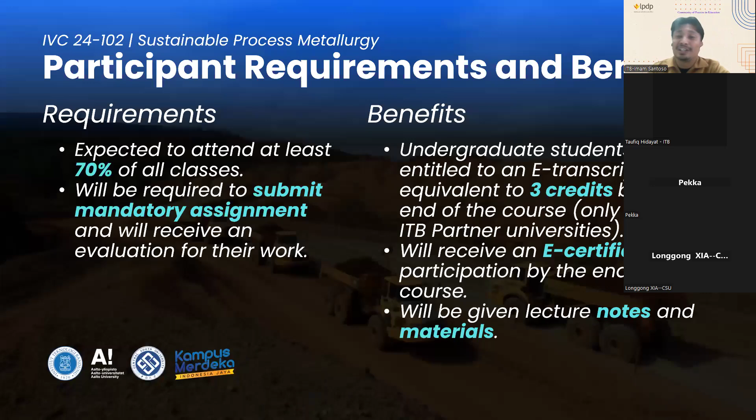So you will have credit for ITB students. You have to attend 70% of the class, and for international students, you will have credit also. The credit can be transferred to your original university. And in order to get credit, you have to attend at least 70%, and you have to write a literature review, minimum 3,000 words. The topic of the essay is recent development of technological review for metal production. So for ITB students, for example, it can be chapter 1 of your final bachelor thesis, because in chapter 1 you have to write like a review.

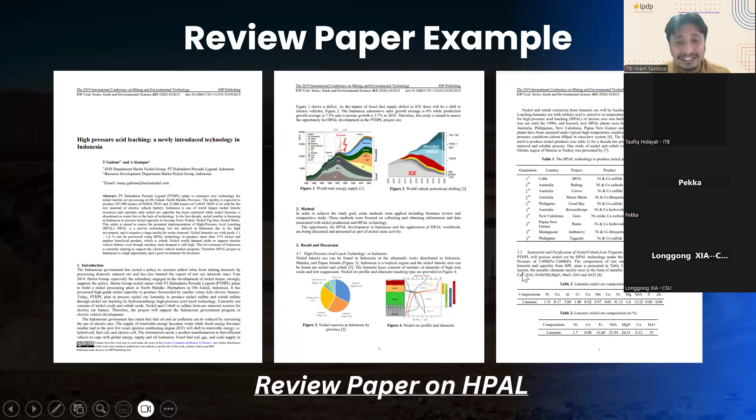All the material, all the links will be submitted in the Edunex system, including your final assignment. You have to submit in Edunex. We will explain later on via WhatsApp how to access the Edunex system of ITB. Because you already enrolled, you automatically have the right to access the Edunex system. So this is the example of the writing, the essay. You will get these materials. And yes, that's from me as the coordinator of the course.

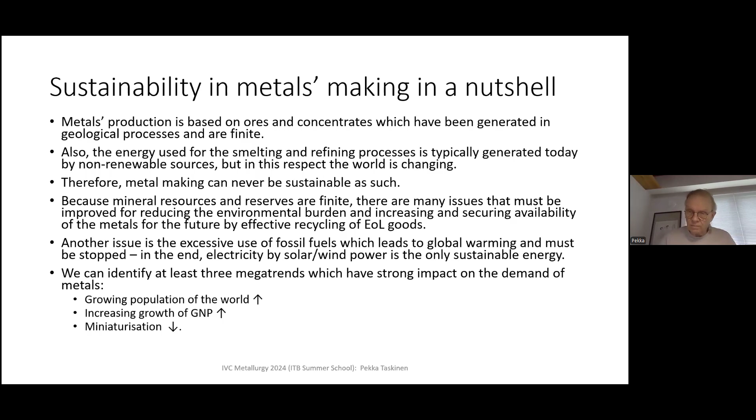The same has happened with cell phones. Nokia, which is not a cell phone producer today, launched their first portable cell phone in the late 80s, and it was like a shoebox. Its weight was probably 5 kilos or something, and it was really portable, but you couldn't squeeze it in your pocket. Nowadays, cell phones are perhaps 100 grams in weight, and their capabilities are completely different from Nokia's first cell phone. So that is miniaturization. Everything is packed into smaller space. All components are smaller, so less metal, less resources in general, which also has some negative features, but that's not the topic of my lecture today.

So how, in a very general sketch, so to say, metals are produced. We have today primary metals production, which is ore extraction and concentration. These are taking place at the mine site, and then smelting. And the same is practically used in secondary metals production, where these end-of-life goods are coming to the market. So municipalities collect them in one way or other, and these are typically mechanical operations. So shredding, sorting into various fractions, plastics, metals, and metals further on to steels and non-ferrous metals, and non-ferrous metals further on to aluminium, lead, and copper.

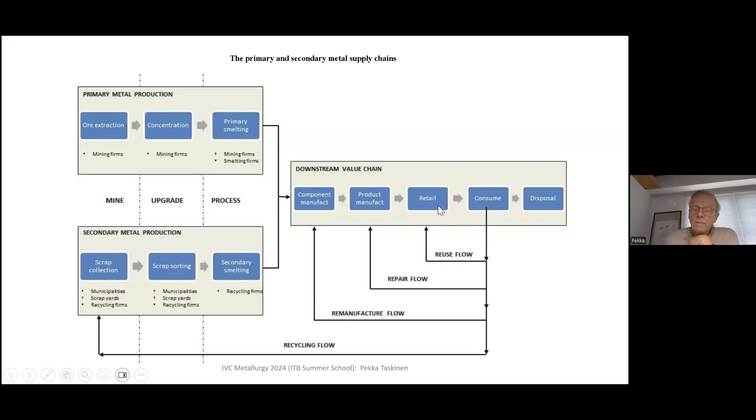And then at some point these fractions are going to secondary smelting, which may be also part of the primary smelting today, and it is often so in Europe at least. And this step produces relatively pure copper, lead, zinc, also iron for steel making and so on. And then there is the actual downstream processing, which starts from component manufacturing. Those components are assembled into products. Products are sent to retail, and then that product is consumed.

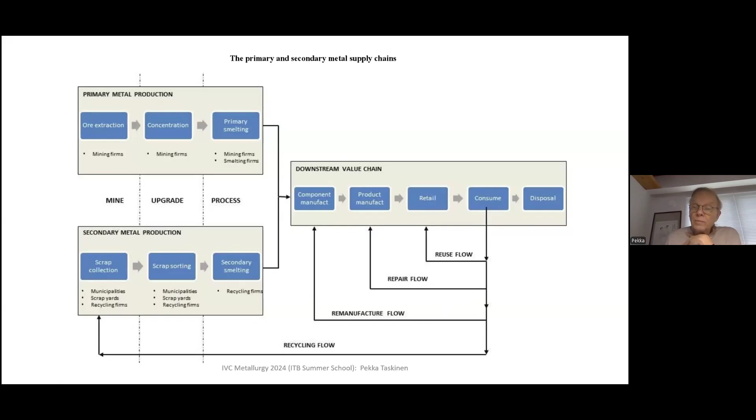And this, which is one of the main messages of mine today, is roughly the circular economy of metals. So we like to do metals consumption in a wide perspective, in such a way that those consumed goods which can be reused will be reused here. And if there is something which can be modified for reuse, this route directs the end-of-life goods to the product manufacturer, and then back to sales and consumption, and it may be even totally remanufactured, so that its end use is something else than it used to be.

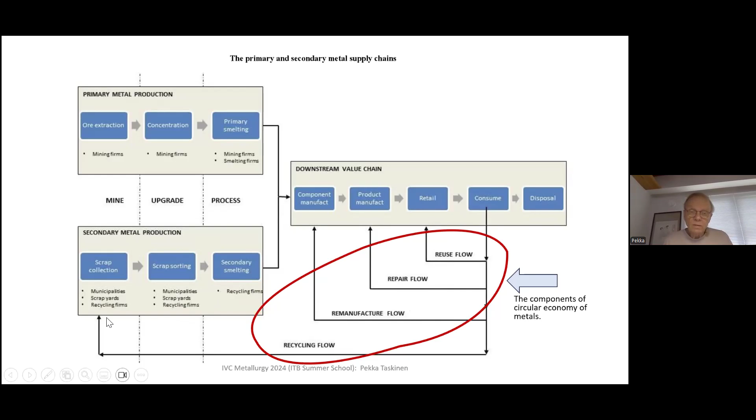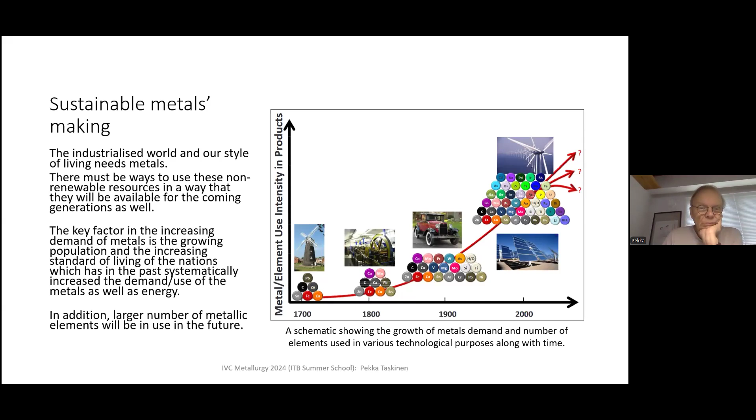As I said earlier, metals production in general is very much linked with energy. And that energy is actually contained in the price of each metal. So that means that metals are never end products. Their value is up to demand, and they are commodities. They are traded between companies who have them and who don't have them, who need them.

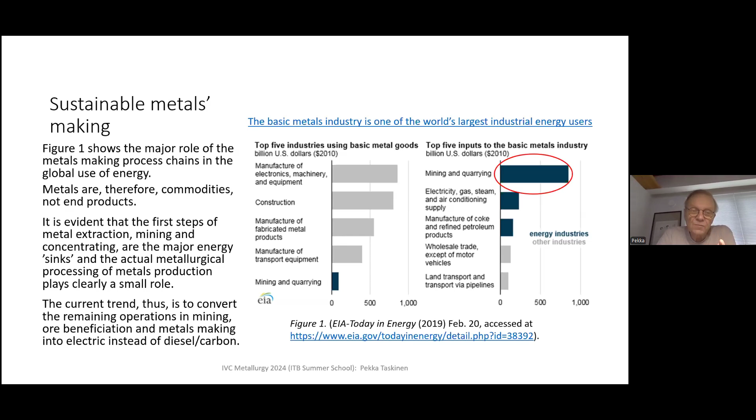So, as I said, when metal making is some day not profitable anymore to a smelter or refinery, energy is typically the thing which is ruining the profitability. And that is why many metal making companies are making rather rough decisions when electricity price, coal price, coke price go up, and they can't get the profits from their metal products because of the expensive raw materials.

How the European Union is tackling this shortage of metals, evident shortage of metals, is really this phrase, circular economy.

The European Union has been estimating a few years ago that only 10% of goods is cycled back into use in one way or other, and out of those extracted 92.8 gigatons, whatever that is, about a third is totally wasted, and more than 50% is dispersed or emitted.

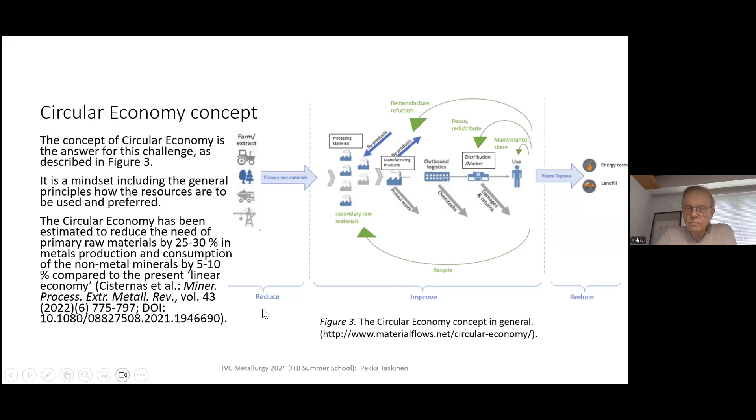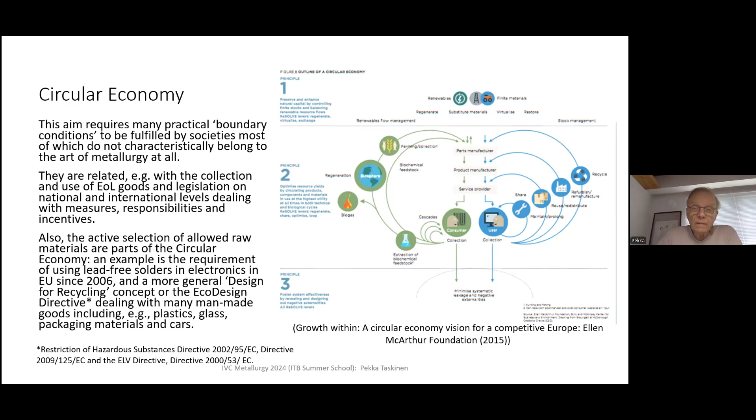So now we don't have to have 2 or 3 transformers and charging wires for cell phones, as was earlier the case. And that also increases the resource efficiency.

If we look at the circular economy in more detail, the Ellen MacArthur Foundation defines this as an economy that is restorative by design, which aims to keep products, components, and materials at their highest utility and value at all times.

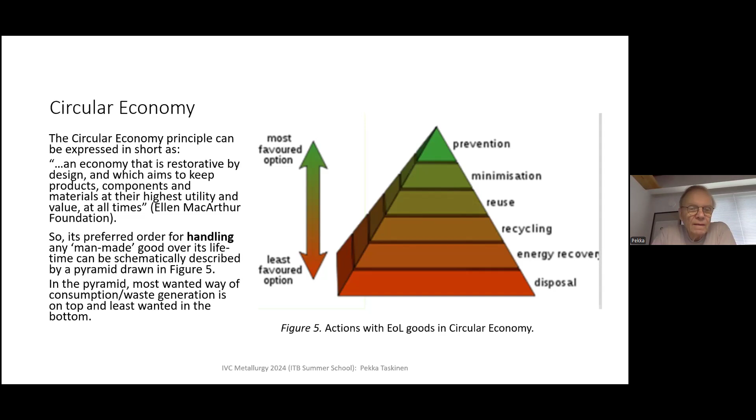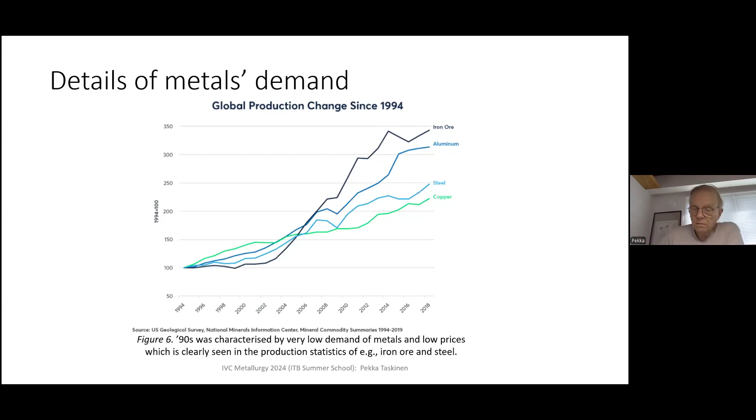Copper and aluminium, perhaps, are metals which are used very much in heavy investment goods, and their lifetime is in many cases more than 50 years. So if we put copper into the national grid now, it's available for recycling perhaps after 70 years, sometimes more than 100 years. That means that metal is not available for recycling.

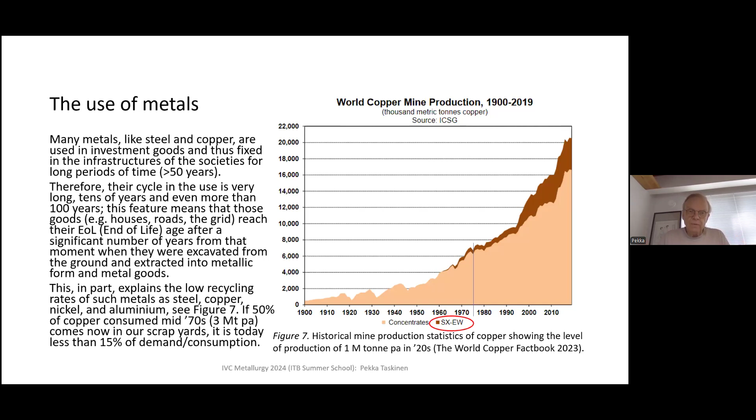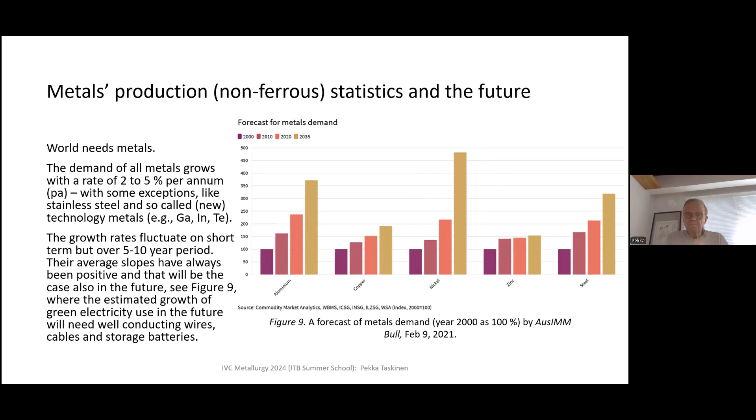How we estimate or evaluate the trends of societies, how those societies are consuming metals, is a rather tricky task. The World Bank and also the United Nations have taken this term in to assist that evaluation. It's not a very well-behaving measure, but it is telling how the technological and technical level of a nation consumes metals.

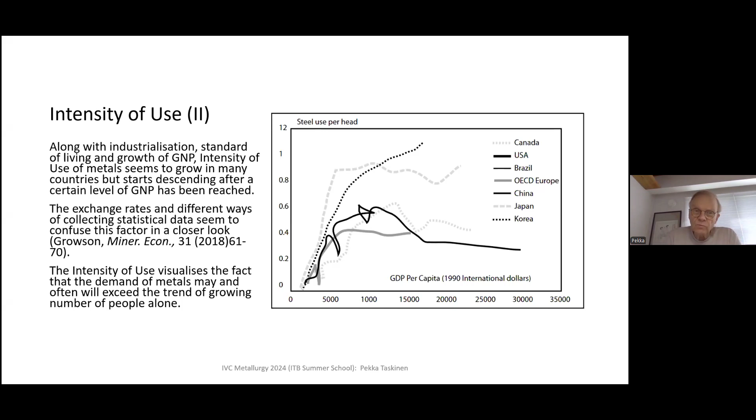Yes. So, as I said, it is not exact and well defined, and the intensity of use is not easy to estimate in cases where inflation and other financial issues are present, but it is perhaps the only way to estimate how nations, not individual persons, are consuming. And this is in wide use as a tool for making estimations for the future.

Availability of energy is one major thing in metal making, and as I said earlier, in normal times, except in very short periods, metals cannot be cheaper than the energy involved in their processing or smelting. Now when we are very concerned about global warming and its major origin, the carbon dioxide footprint of an operation must be taken into account. In the future, this CO2 footprint may limit the use of metal in certain applications and support development of substituting materials in those end uses.

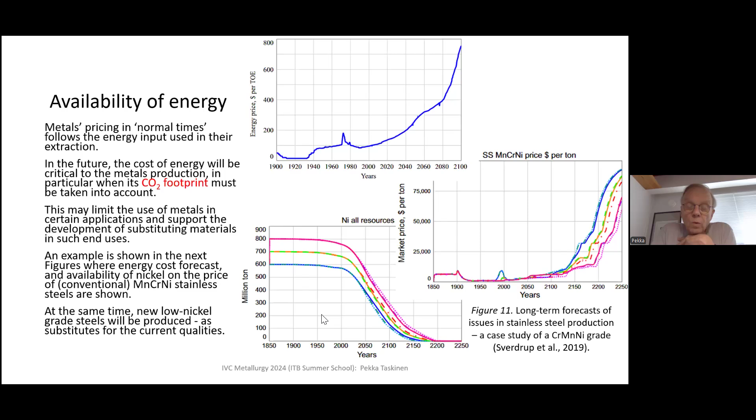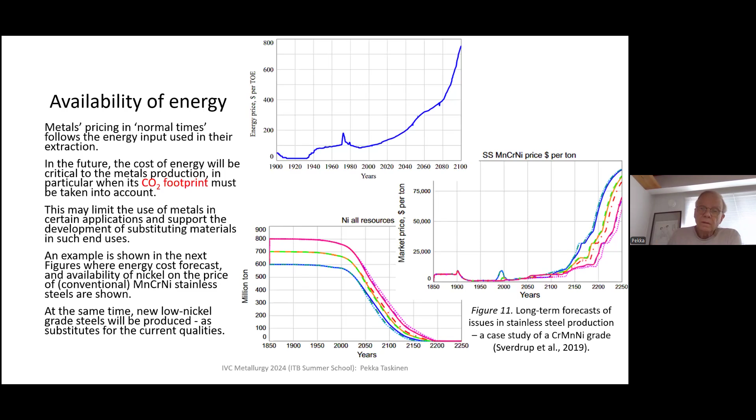But after 2100, there will be a major increase in price, and that means that today the stainless steel industry is developing low nickel, high manganese grades instead of the current qualities. This is a rough forecast, and we understand it cannot be accurate, but it gives a nice indication of how two major components of stainless steel making, energy and nickel, impact the price of stainless steel.

A much shorter term worry is now the actual nickel and cobalt availabilities.

For electrification of the societies, that means that cobalt, which is a very small metal by volume, and nickel, which is produced perhaps 2.5 million tons a year, there is indication that cobalt is first consumed in such a way that cobalt resources have difficulties in satisfying the demand. And that means that also these cobalt and nickel based battery chemistries will not last long.

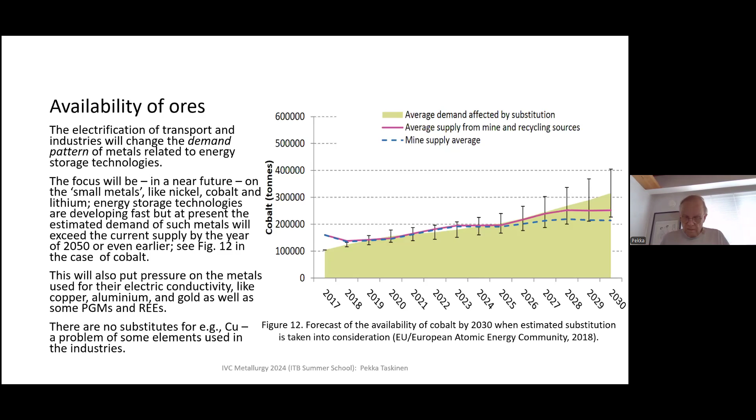Then there is one major problem on our horizon. In many cases, like stainless steels and these battery chemistries, we can hope at least that there is a substitute coming for a certain recipe. But if we need to transfer electricity effectively, that means that we need copper, and pure copper, 99.99% pure copper. And there is no substitute for that. Well, silver has slightly better conductivity than copper, but it's not available so much that it could act as a substitute for copper. All right.